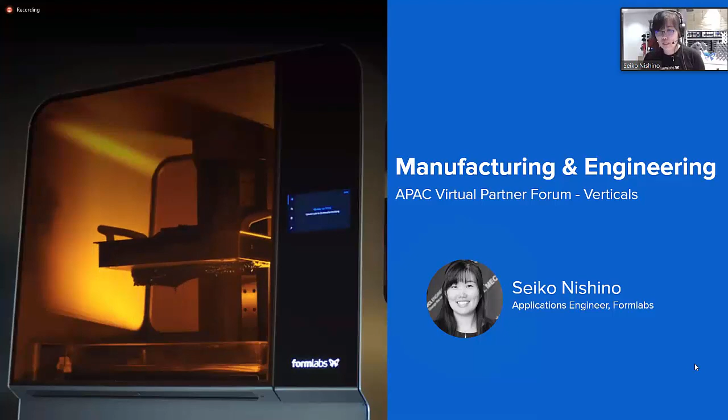We will be covering verticals as already mentioned. For those who do not know me, my name is Seiko. I'm an applications engineer at Formlabs, located in Singapore, and I'll be covering the manufacturing and engineering vertical.

In this session, I'll quickly cover a broad intro to 3D printing within manufacturing and engineering, the target applications, together with some case studies for each application, the competitive landscape, Formlabs strengths, and our strategy going forward, and finally some Q&A. Once again, don't forget, questions go into Q&A. So with that, let's begin.

This session's vertical is manufacturing and engineering, looking at the overall sales and revenue of 3D printing of desktop and industrial 3D printers. So this is not necessarily just Formlabs, but looking at 3D printers as a whole. 3D printers have skyrocketed in revenue, increasing by a factor of 8 over the past almost 9 years, with 100 times growth in 3D printer sales.

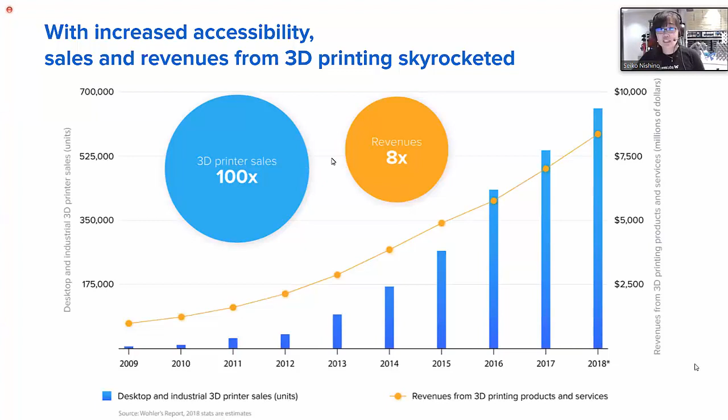With these printers, these applications are soaring as well. Printers have this impression that they're meant for one-off parts and prototyping, hobby parts, which is most definitely true. I think you guys are fully aware of this, but this has been gradually changing to applications with not just one-off prints, but more small-scale production or more customized parts like dental aligners, customized jewelry, earbuds, and so on.

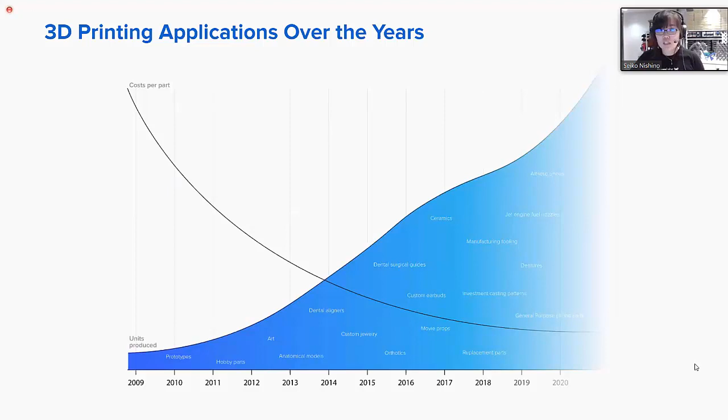So we do see the trend where 3D printed parts are being used as more functional parts in a larger scale of production. So this part of the session, I'll focus more on the manufacturing and engineering vertical, which is actually our largest vertical than any other single vertical here at Formlabs.

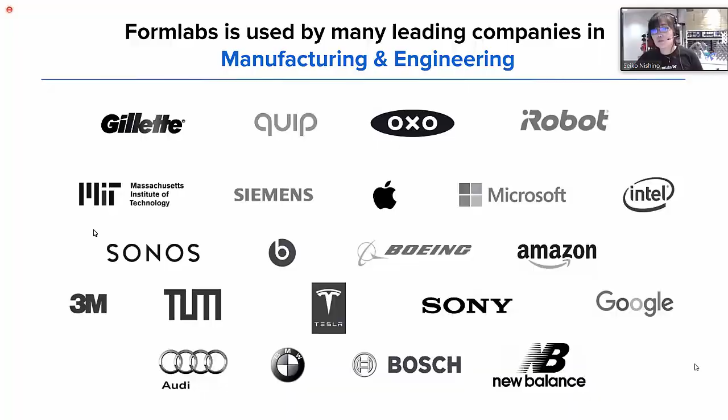We have been working with and also partnering up with many leading companies in the field. I couldn't possibly cover each of their applications, but I'll cover some target applications within this vertical to sort of uncover a sense of scale to some of these applications and some pain points you might see when talking to a potential customer in this field.

So starting off, the target applications I will cover today will be prototyping, tools and tooling aids such as jigs, molds, brackets, and then finally production.

Moving on, prototyping. Prototyping is a very common application that I believe you guys are dreading to hear about because you're very familiar with it, but I do want to stress prototyping is a very easy entryway and a good way to start with upselling.

Our resin portfolio and versatility of our printers really do shine, especially in prototyping, allowing for ergonomic features with a combination of our flexible resins as well.

We also have our draft resin, especially given a lot of your feedback saying that competing with FDM, the biggest pain point is speed. Draft resin was specifically designed not only for fast printing, but also for minimal cure. I understand some of our printers or resins have 60 minutes of curing on top of their print times—we have literally addressed both the print time and the curing time as well.

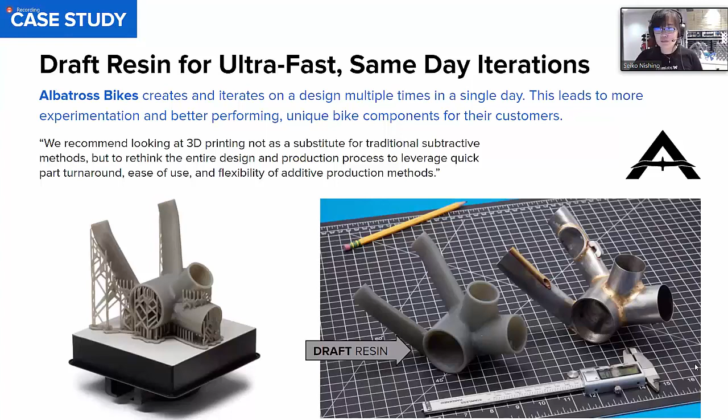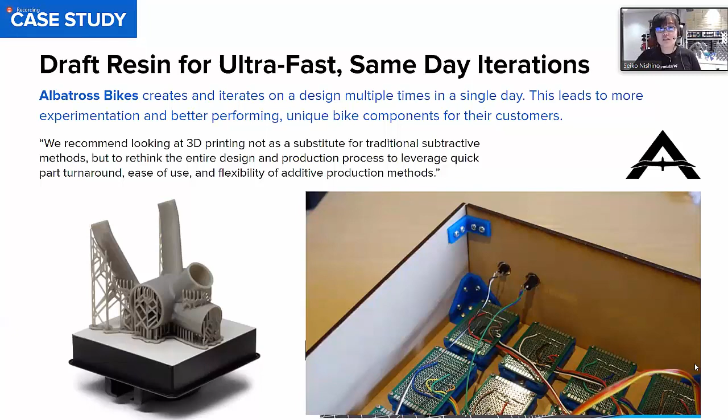It's also smoother looking compared to FDM and isotropic, meaning unlike FDM parts, these are more practical parts which can be drilled into as well. But I'm sure you're very familiar with prototyping, so let's move on to other applications we see potential in and have seen success in as well.

Moving on to tools and tooling aids. When talking to customers, especially those in manufacturing, there is always an underlying understanding that plastic will never be as good as metal, which is true in some aspects.

Yes, comparing say the ultimate tensile strength of steel, plastics may not necessarily ever get there. But always ask a customer, do you really need that?

This is a good example where Formlabs printers were used for prototyping initially, so that's our starting point, but they moved on to deal with an issue they had with an L bracket made of aluminum. The L bracket was bending over time, being used on a gripper tool. A gripper tool is basically a machine on the conveyor belt which picks up a part from one section of the conveyor belt and places it on the second section.

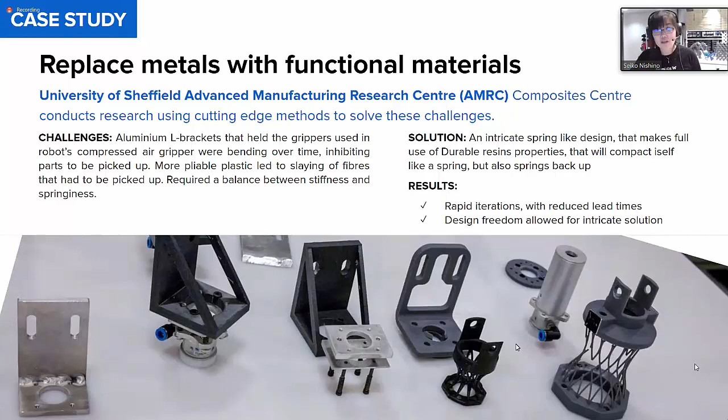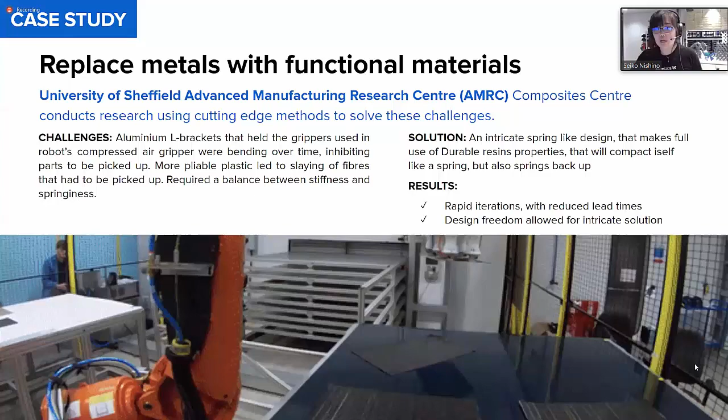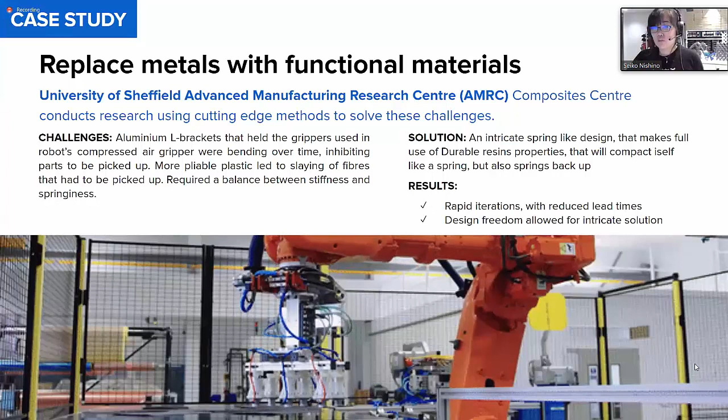So you can see here that Formlabs is being used for prototyping, but it doesn't end there. They eventually landed on an intricate spring-like design that was printed on our durable resin, which was great for this specific application, especially because of the springing back nature of the material. So unlike metal brackets that ironically plastically deformed after prolonged use, our 3D printed durable resin actually served a better function.

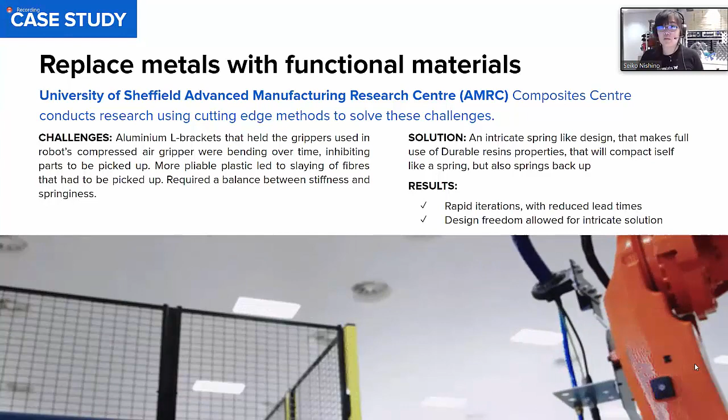So this is a good example where prototyping led to toolings, and an example where plastics actually replaced metal. We have another example here where Formlabs printers were once again used for prototyping, but during a very time-sensitive project where they had to produce thousands of custom jigs for the production of gears, and their usual path, which will be outsourcing, couldn't address this essence of time.

Our printers were used to print custom jigs, replacing outsourcing. So not only did Formlabs printers address the essence of time with a 90% reduced lead time, but also would lead to a cost saving of $170,000 over the course of production.

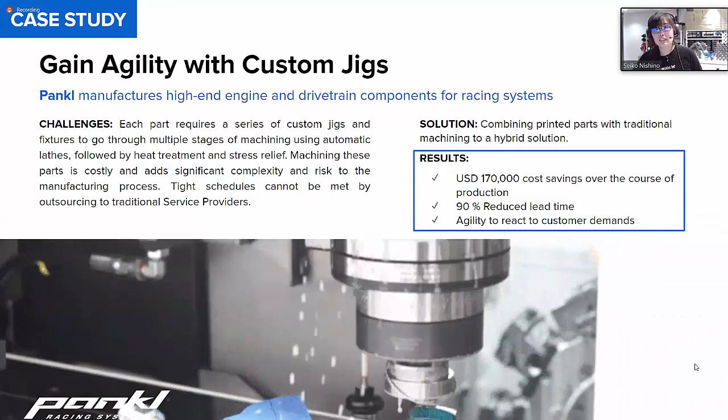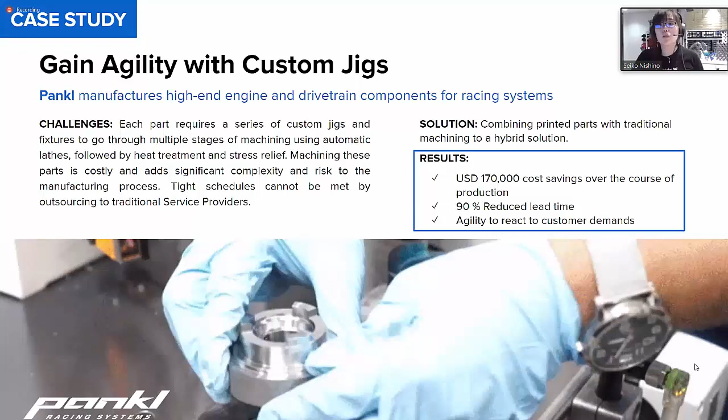So when talking to customers about replacing, say, a certain traditional method or whatever they're doing right now, always try to calculate an ROI. It may smoothen out some conversations, and if it is quite difficult to calculate ROI without having a full understanding of their current workflow, you can use case studies to give them an idea of what to expect with other customers.

We also try at Formlabs to continuously expand our collection of resin, not just to increase the addressable market for you guys, but also to add value for each and existing customer as well.

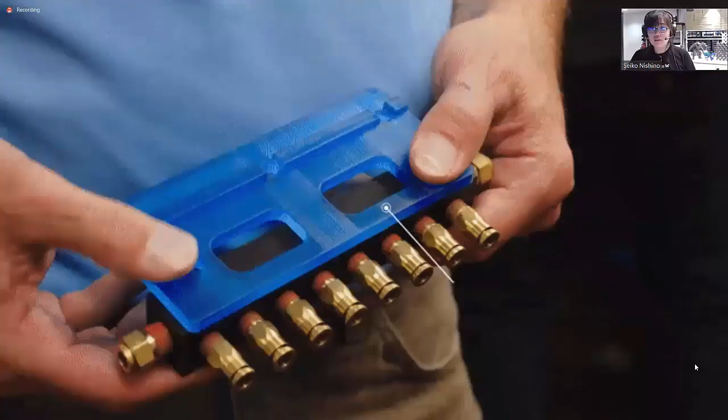So this is a good example from a huge furniture manufacturer called Ashley Furniture. They were once again using Formlabs printers for prototyping, a very common story, but they slowly realized that the materials could be used for many other applications on their factory floor. Now they're used for things like jigs, retainer rings, drill bit guides, pin tack tool guides, air manifold mounts, and many more varying applications.

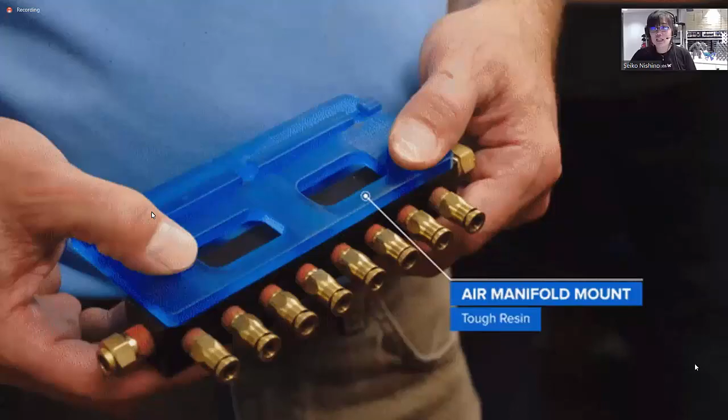So these parts were actually mostly printed in tough and durable resin, and as of now, 300 3D printed parts are on the fabrication site, and an additional 400 3D printed parts are in the assembly area, totaling 700 3D printed parts that are in service in the factory. So it really gives you a good idea of the scale of how 3D printers can be used.

And I understand trying to identify each of these varying applications is difficult to do when talking to a customer, but try to keep an open mind and ensure, as part of customer education, that the customers themselves are informed of this potential, because they will best find the best applications of our 3D printers.

So going back to Ashley Furniture, thanks to Formlabs printers, they replaced nylon machined alignment pins that had a minimum order quantity of 1,200, and they replaced it by printing them in-house with our durable resin, leading to a cost cut down, and also they were able to avoid any minimum order quantities, and they were using it for many other applications.

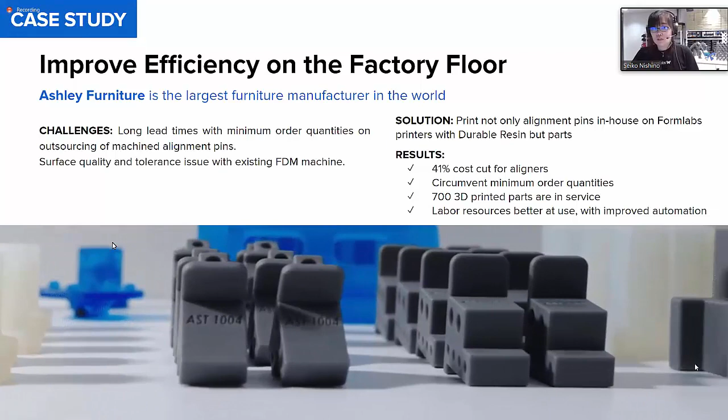So tooling aids are commonly made with our tough and durable resin, as I mentioned, but never forget our other resins, which are quite functional. For example, our high temp resin here.

So this is another example with nuclear AMRC. The customer is looking to develop brackets and sensor holders, especially in high heat environments, and they used to do this manually by having people walk into these areas, which was dangerous, hazardous, high heat, and it also took a lot of time to cool down for people to actually step in.

So instead of depending on that, they instead got sensors everywhere, so they have a more streamlined workflow to identify if anything is going wrong.

But when they tried to get sensors on, they needed brackets that could withstand high temperatures, which was, you guessed it, printed in high temp resin. So it gives you a pretty good idea.

This is a very niche application, I would say, but nonetheless, keep your mind open to applications. I do see that we talk a lot about our high temp resin for injection molding or specific molds for silicone or thermoforming, etc. But the applications with 3D printers are unlimited, and I'd say the same for our resins as well. So don't cross out all the resins and focus on tough and durable when you're doing jigs and fixtures. Just keep your mind open. There are lots of resins that may actually fit into a customer-specific application.

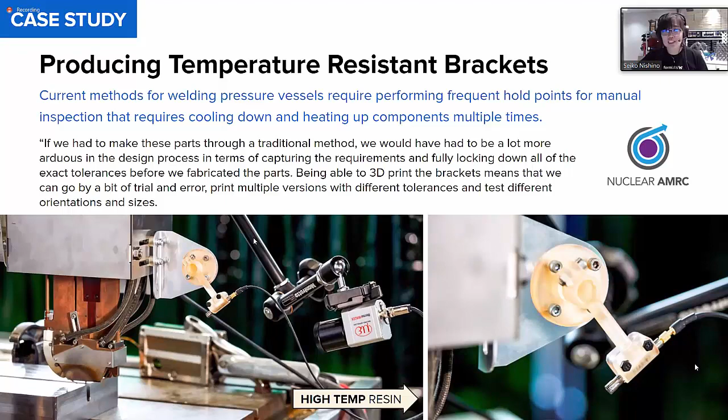But moving away from jigs and fixtures, let's talk about mold making. Mold making, as you guys are already very familiar, is used across industries by product designers, entrepreneurs, and in manufacturing to create short production runs, prototyping of complex models, test production, and end-use plastics, etc.

Injection molding, in general, is a versatile process that is used to produce high volume parts, but it may not always be affordable. Actually, it's very unlikely to be affordable or quick and easy to produce, especially if you're CNCing these molds. Now with 3D printing, or 3D printed injection molds, they tend to be faster and less expensive compared to CNC milling and other traditional forms of mold making.

We do have a couple of case studies with injection molding. What you see on the screen now is a pretty good example with Braskem, where once again, there was a project that had to be dealt with immediately, and they needed mask straps, and that too in the thousands. They needed it in a crunch of time. I think there was a timeline of 2 days to 1 week, and outsourcing was clearly out of the question. In-house FDM printers, which they did have, proved to be too slow.

So that's where Formlabs 3D printers were used to print molds for injection molding on high temp resin. You can actually see the high temp resin 3D printed injection mold here, and the injected part as well. So that way, they were able to produce thousands of mask straps in a week, each mold withstanding 1,500 shots, leading to a time saving and a cost saving of approximately 90% compared to traditional methods.

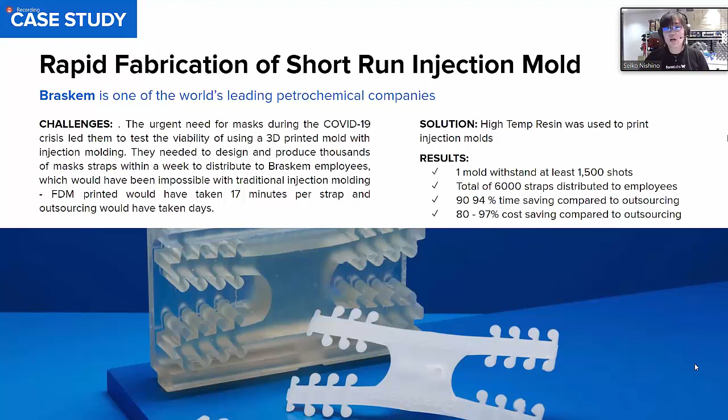So here are some case studies we have with injection molding with both rigid 10K and high temp resin. There are success cases, but in no means do they define the limit of what we can injection mold.

Now, a big shout out to Multiplus. Multiplus is our partner in China who has cooperated in testing and helped us document the entire process. So if you guys think there's an application we can develop together, we are always open to such ideas. Always reach out to me or your applications engineer in your region.

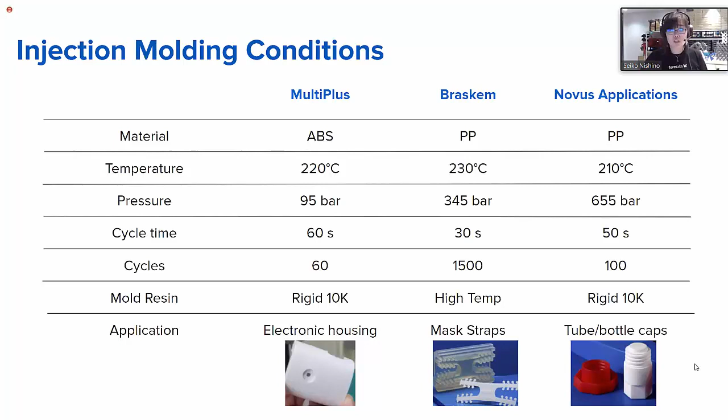For example, there could be applications such as composite molding with carbon fiber layup, which is a relatively uncovered application. But we do actually still see cases with this. We have seen 3D printed molds. You can actually see the high temp molds here, where they were 3D printed to make carbon fiber panels over the rear wheel of the car. You can actually see on the right-hand side, a racing car body panel.

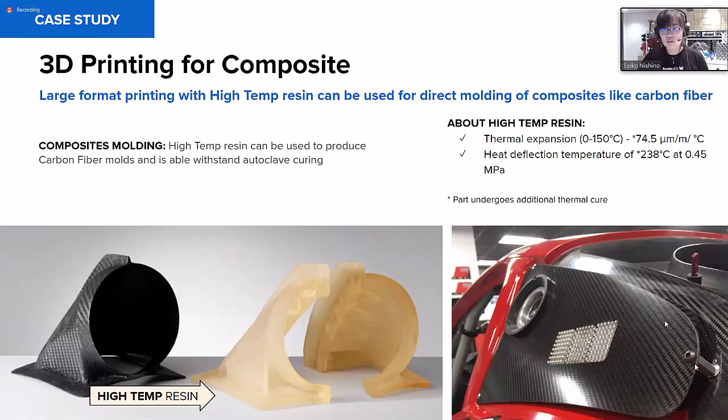So there's literally a lot of different applications, but I'm not going to cover all of them. That was just to give you an idea of the scale of the 3D printed tools and tooling aids we have seen so far. But moving on to the next target application on production of final parts.

So let's start off small scale with one-off parts. This is using castable wax outside of jewelry and dentistry. Castable wax has been used for casting out emblems of cars, as you can see in the picture, top right-hand side.

On the bottom right-hand side, you can see clear resin electroplated with a thin layer of nickel to make hubcaps for concept models of the classic Volkswagen minibus from the 60s. What a lot of people miss is that you can combine 3D printing with other processes, taking 3D printed parts to the next level.

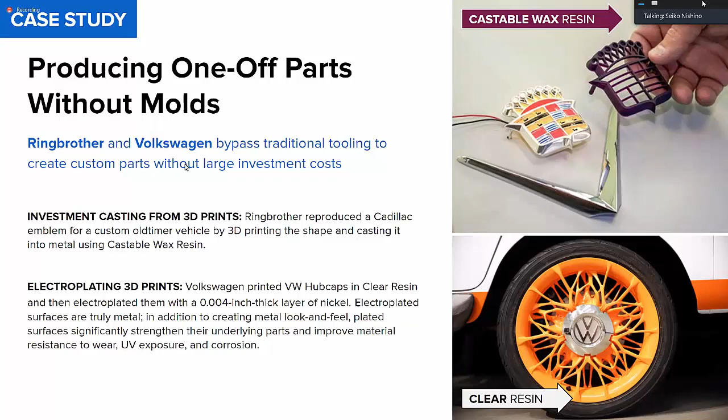But moving on, let's have a look at more production on a larger scale that makes full use of the ability of 3D printers. That would be mass customization.

I was hoping to talk about Gillette, but I realize that's an overly used case study. We have an example here with Twikit, quite similar to the Gillette case study, where customers could pick out and design their parts, which they then ordered online, and parts were printed on a Formlabs printer. This way, the customer Twikit doesn't have a mold, so you don't have to invest in a mold. That makes it cheaper, and you can maintain flexibility to accommodate custom parts for their customers.

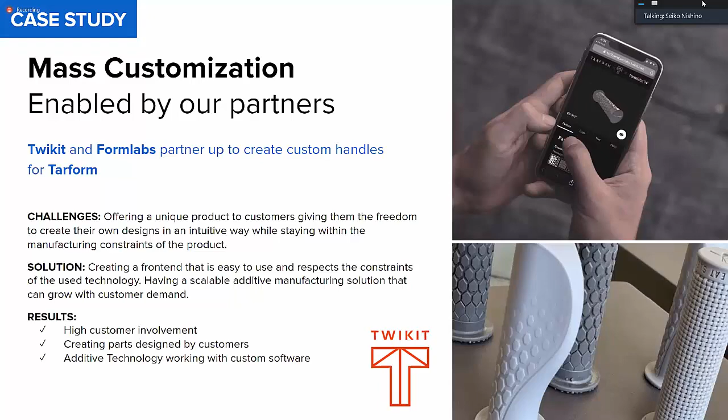And of course, never forget, we have our case with New Balance. I'm aware you guys are very familiar with this, but I couldn't miss it out, though I won't go into too much detail. Shoe soles were printed on Formlabs rebound resin, specifically developed for New Balance.

Don't cross out mass production level with 3D printers. We are getting there. Keep your eyes open for such applications, potentially in audiology, dental orthodontics, etc.

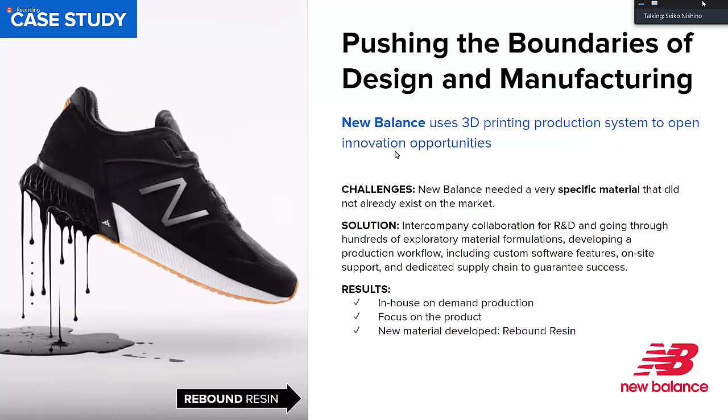That's pretty much what I wanted to cover for target applications, but applications aren't the only thing you have to talk about with customers—you also have to compete with other printers. Let's look at some comparisons between printers we sometimes compete with when talking to customers.

The first comparison is to the Ultimaker S5, or FDM/FFF as a whole. There are a couple of benefits of Form 3 compared to FDM, but it really comes down to the functionality the customer is looking for from the 3D printed part. The reason I say this is because, being honest, FDM does beat us when it comes to cost of the part.

But if the main focus of the customer isn't cost but rather value, that's where you can offer a Form 3 with the range of functionality and materials we provide, and of course parts being isotropic, therefore more functional, especially in load-bearing situations. There are certain aspects where we won't win, such as cost, so we're very much aware of it. We try to add value to 3D printers, and that's why we talk about adding value.

Comparing to SprintRay Pro DLP printers—one thing our sales team faces, especially in the US with DLP, is their incredible speed. I do see some parts we may not necessarily win, and I agree with that. With that said, speed really isn't everything. Some customers may prioritize it, I understand that, but...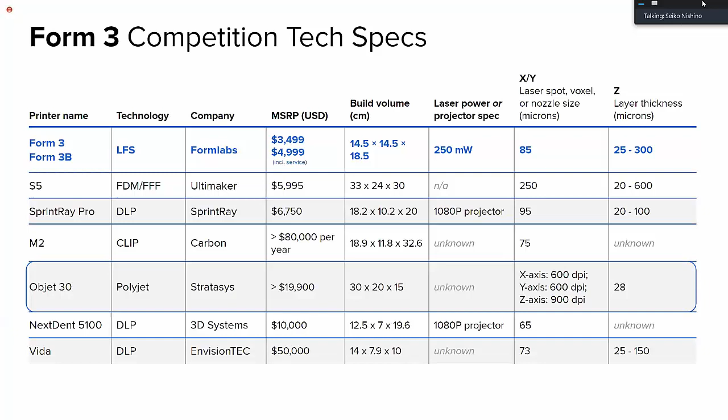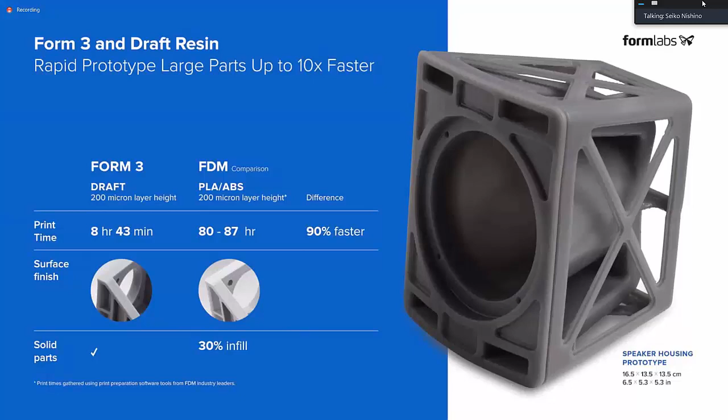I can't go through all of it, so I'm going to move on quickly. We do try to highlight a lot of the differences. I understand a lot of you get questions about how is it better or different compared to other 3D printers. There are resources we make available, like the one you can see on your screen right now. We do have it on our website, so keep an eye out for this.

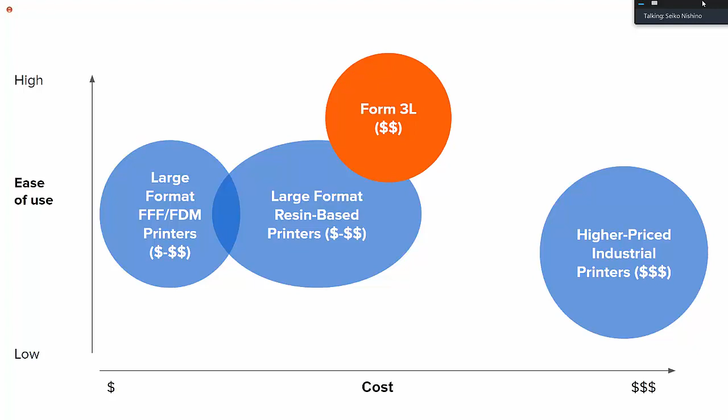Quickly comparing the Form 3L - you can see here a quick comparison of cost versus ease of use against 3D printers of the same size. Yes, Formlabs printers are easy to use. I don't know if you've had the chance to use a 3L yet, but it's literally the same setup as the Form 3, so you can confidently say a large-scale printer is as easy to use as the 3.

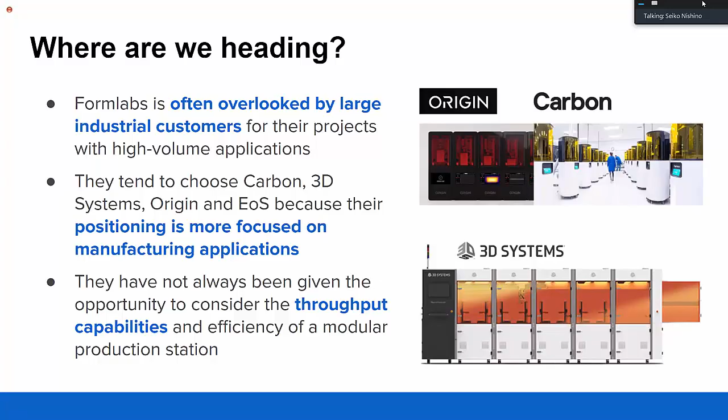However, I want to say that we are commonly overlooked by large industrial customers for high volume application projects, who usually go for Carbon, 3D Systems, Origin, or EOS, because their positioning is more focused on manufacturing applications. We are currently changing that - trying to make it more of a norm to scale up from one printer to five, or even a print farm. That's where we're trying to head.

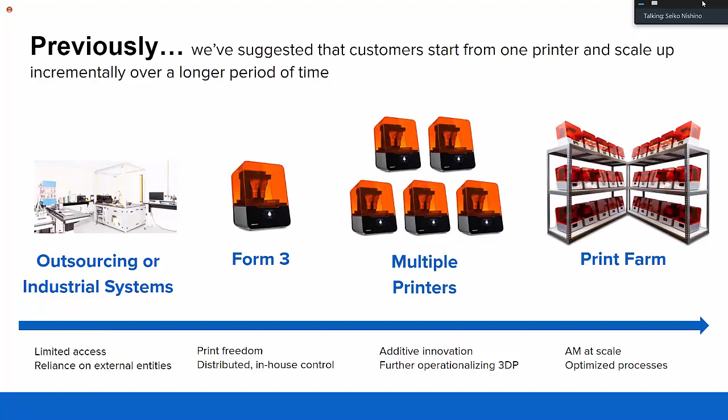In order to support that, we are producing more material, and ensuring the materials we produce meet the specific application. We have a customer success management team in both Berlin and Somerville. You may think this doesn't apply to you, but a lot of the feedback you give us actually goes to them. For example, Tough V5 was changed from blue to Tough 2000 gray - that's one example where your feedback was reflected.

On vertical specialization, we're making sure - today's actually a good example - that we have specialists in different verticals. We have Yasmin, who's coming on later. We also launched our Factory Solution to better address and support holistic production with Formlabs products.

We have our growth - I'm going to skip that and talk about what's coming next. We have Fuse, and other products coming up to better support large-scale printers, large-scale applications, and large-scale production. I want to clarify there's been a lot of changes with Dashboard - I really suggest you check that out. We're implementing grouping to make it easier for multiple printers to work within multiple groups.

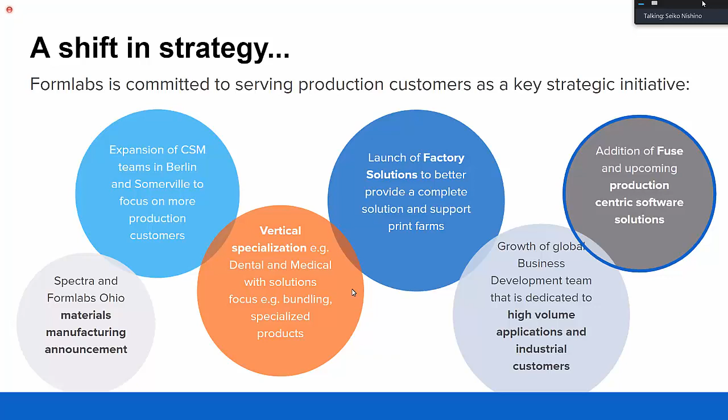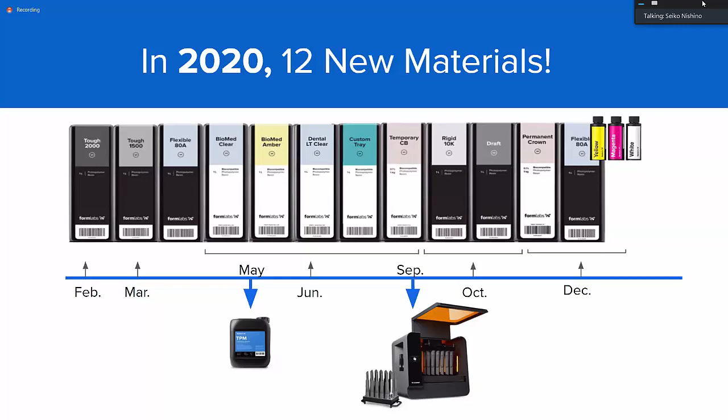I realize I went over time, so I'll quickly talk about materials and move to Q&A. As you're familiar, we produce materials every single time, not just to increase the addressable market, but also to address the lifetime value of each customer and increase functionality and value to our 3D printers. We even launched Rigid 10K, which is now used for injection molding. With that, I'm going to move on to Q&A.